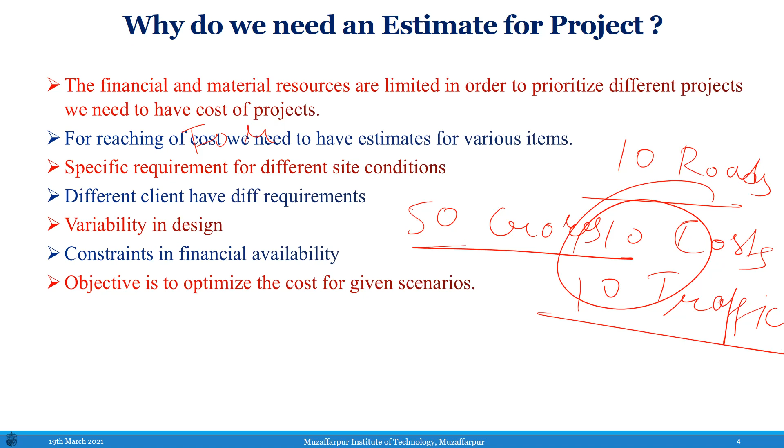So for these 10 roads, you have 10 different costs and 10 different traffic levels. So you have very limited resources of 50 crores, and based upon these 50 crores only, you have to prioritize these 10 roads. So priority is based on keeping the traffic in mind, and the cost is also very important.

Cost is one of the main criteria for setting out the priorities. So accordingly, based upon these, we will have the priorities of which road will be improved first, and which roads will be improved later. So the financial and material resources are very limited. Based on this, you need to have the estimation and cost of the projects.

For reaching the cost, we need to have estimates for various items, as we dealt with in the previous slide. Then there is a specific requirement for different site conditions. You have different site conditions, and for different site conditions you have different components, and these components vary based upon different sites.

Let's say you want to build something in Jammu and Kashmir, and if you want to build something in Bihar, both are different. The same three-story building will have different components, and the availability of material is different for different places, and the transportation difficulties are also very different for different places.

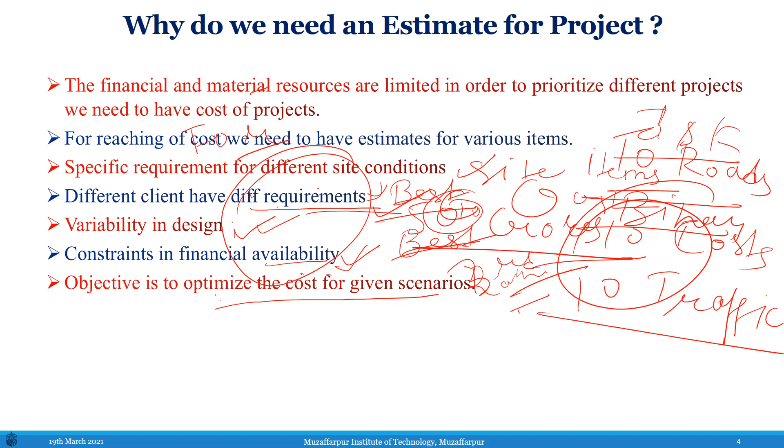Then you have variability in design. For variability in design also, you need to have the estimate. Constraints in financial availability, as we dealt with, we have limited financial resources, so we have to optimize. The objective is to optimize the cost for a given scenario. So for all these specific purposes, you need to have the estimate for a project for decisions. Then, requirements for preparing estimates.

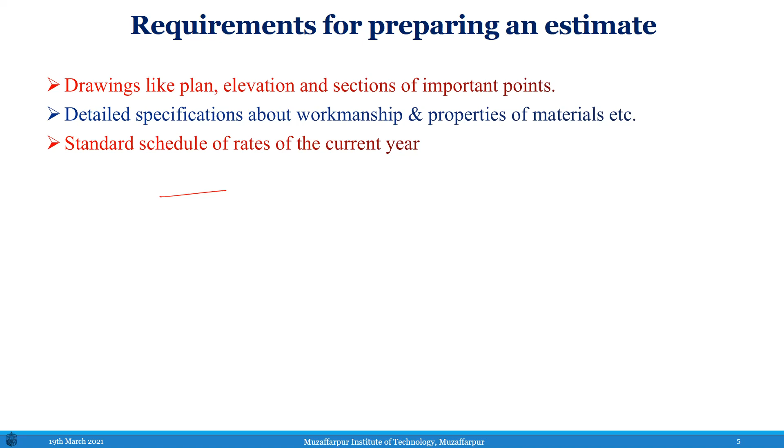First requirement, you need to have your plan for your building, and then you need to have the section for your building, because in the plan you will get the area, and with the sections you will get the heights, and based upon this you will be able to calculate your quantities for material. So you need to have plan, elevation, and section at different important points.

Then you need detailed specification about workmanship and properties of the material, meaning thereby you have different classes of brick, and their rates are different. For different purposes, you need different classes of brick. So meaning thereby, based upon your requirement, your specification are varying.

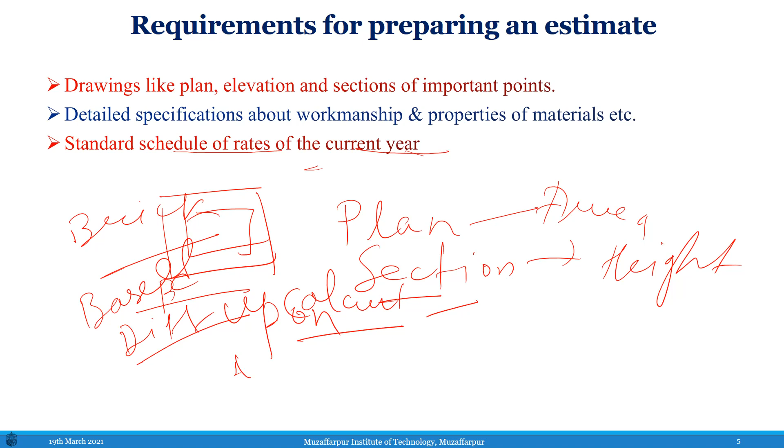Specification varies, so for different specification, what kind of specification you want. So you have different types of paints, which paints you want. Based upon your choice, the rate will vary. So you need to have the specification with you.

Then detailed standard schedule of rates for the current year. So what is schedule of rates? Schedule of rates, that is called SOR. Mostly public works department of different states, they publish SOR every year, or maybe with some time interval. What this SOR does is, it gives you the basic rates of different kinds of material based upon a specific specification. You have different rates for different items.

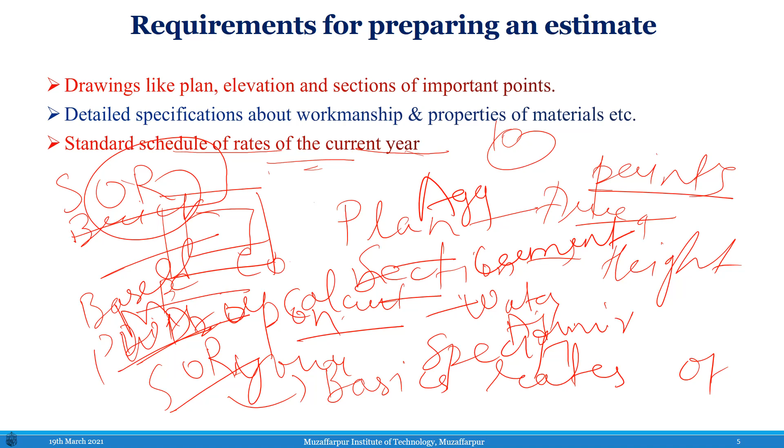Let's say if you want to evaluate the rate of concrete, M20 concrete, you need aggregates, then cement, and water. Maybe you need admixtures, maybe you need aggregates in fine aggregate and coarse aggregates. So for these different materials, you have different rates.

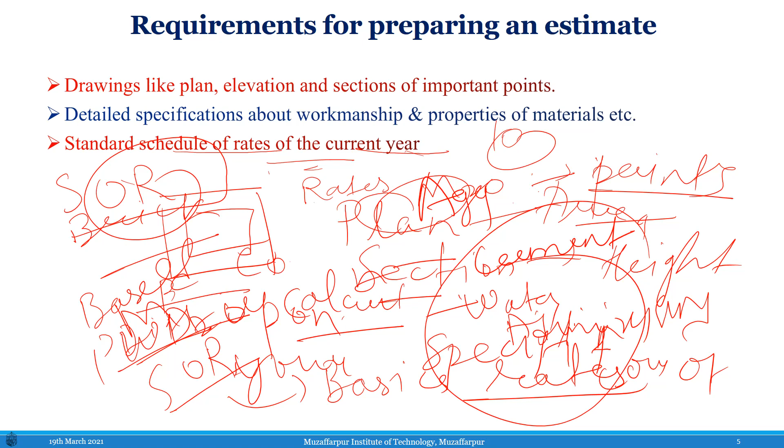So for calculation of rates for a particular component such as M20 concrete, you have different kinds of material. For arriving at the rates of M20 concrete, you need to have the different material rates, and these material rates you will find in the schedule.

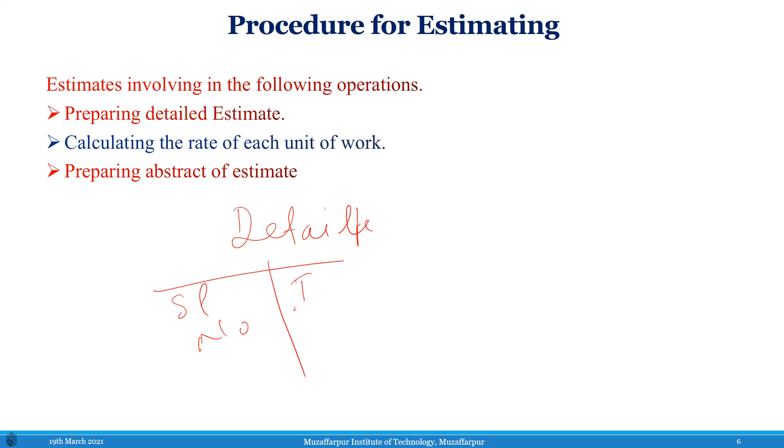So, procedure for estimating. Basically, estimating involves the following process: preparing a detailed estimate. Detailed estimate means you have serial numbers, then you have different items. Let's say items like earthwork, then PCC, maybe you have brickwork.

So you have different items, and then you have the quantities of these items. Then you have the rates of these items. So this is called a detailed estimate, meaning thereby item-wise estimates you are preparing. Based upon calculating the rate of each unit of work, and based on that you have a different component, and you are trying to put together a particular abstract of estimate.

Basically, we have two types of estimates we generally do in normal circumstances. So what are these two types of estimate? First is the detailed estimate. Detailed estimate, what I have shown is the detailed estimate. The other one is called rough estimate, or approximate estimate.

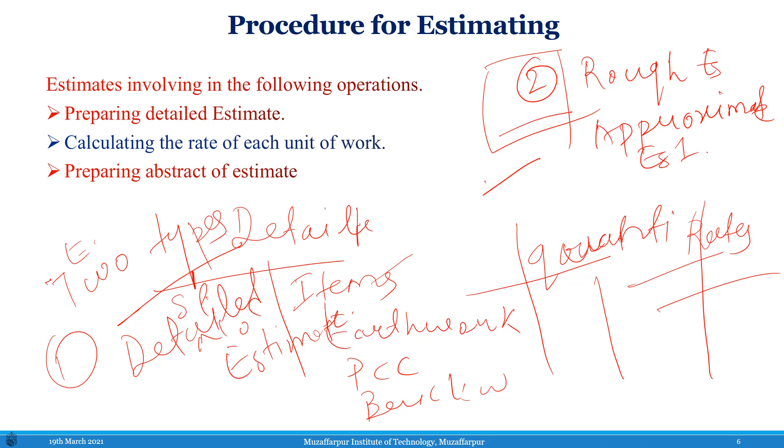So what is this estimate? This estimate, basically, we are doing approximately. So this is done either by plinth area measure, plinth areas. Based upon your plinth area, what will be the unit rate, or per square feet rate of a particular building type. So based upon that you are calculating. Based upon that you are able to get a rough estimate of what is the area of the plinth you want to build up, and based upon that, per square foot or per square meter, what is the rate.

In some cases we are taking the rough estimate in running meter. Let's say you want to build a 40-meter span of a bridge. For this 40-meter span, you will calculate and evaluate a rough estimate based upon your running meter. What is the running meter cost of a per lane bridge?

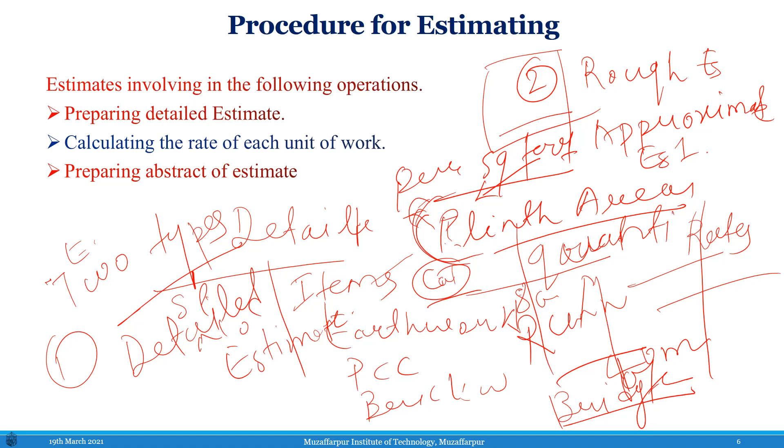So that's the type of estimate we discussed, and now as we know, you need to measure the quantities, and then you need to measure the costs. So quantity, how will you evaluate the quantity?

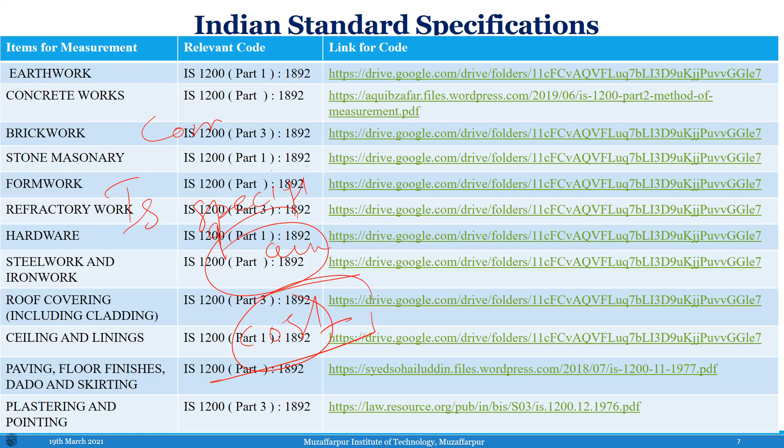There is different specification, Indian Standard IS specification, for the measurement of different components of civil engineering works. For this particular course we are not going into the detail of these specifications, but we have different sets of specification starting from IS 1200 part 1, 1892. For detail you can visit these links, and you will be able to know how to measure the quantity of these components.

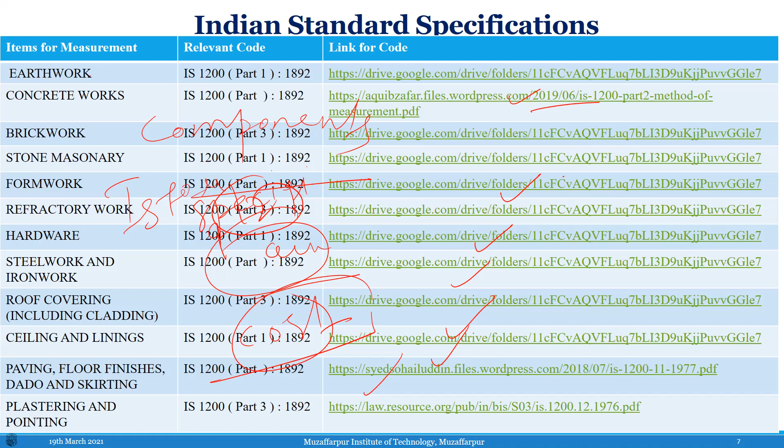So for earthwork, we have IS 1200 part 1, 1892. Then concrete works you have different codes. Then brickwork, stone masonry, formwork, refractory work, and everything is there. So based upon your specific requirement you can visit these codes and learn. I have listed only 12 parts, but you have more than 20.